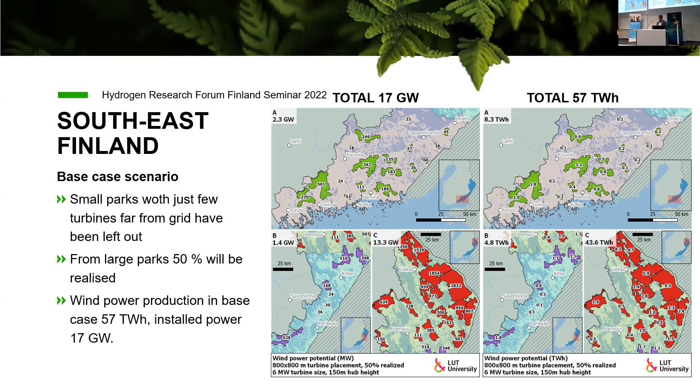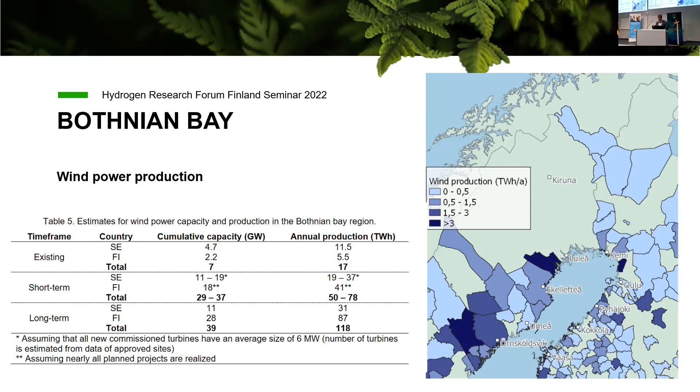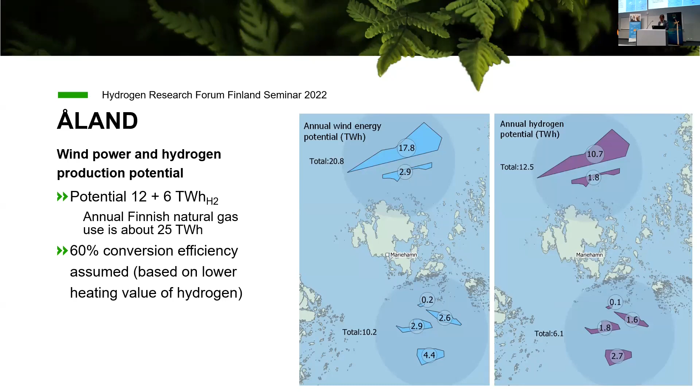A similar study was done for offshore wind power potential in the Åland region, also thinking of converting it to hydrogen, either offshore or by transmitting electricity to the mainland and then converting that electricity to hydrogen in a later phase. So these are just a few examples - of course there are many other places in Finland, and the actual potential is much more.

We've also been looking at solar power potential, especially in southeast Finland, looking at this kind of large-scale potential, mainly looking at peatlands and existing peat production areas, mainly for the reason that they are easily available from map solutions and are areas that already have some kind of road infrastructure. But there are also other areas beyond peat production, like wastelands, that could be utilized. We looked at the peat production areas and also some rooftop areas in this southeast and east Finland region.

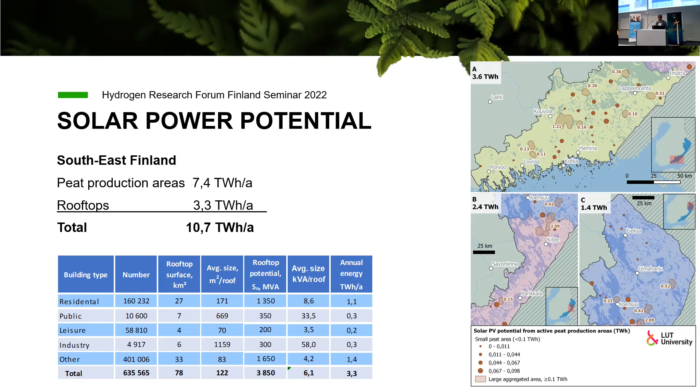With a 50% utilization rate - so 50% of peat production areas covered with solar panels - would lead to some 7 terawatt-hours, and rooftops, with let's say only half the roof and half of that covered with panels, would give some additional 3 terawatt-hours per annum. So solar power potential in terms of energy is also significant - about 10% of wind power potential, or even a little more in this area. They complement quite nicely with wind power, so often when it's not so windy, there's solar, and vice versa. Of course, the problem of seasonal storage still exists.

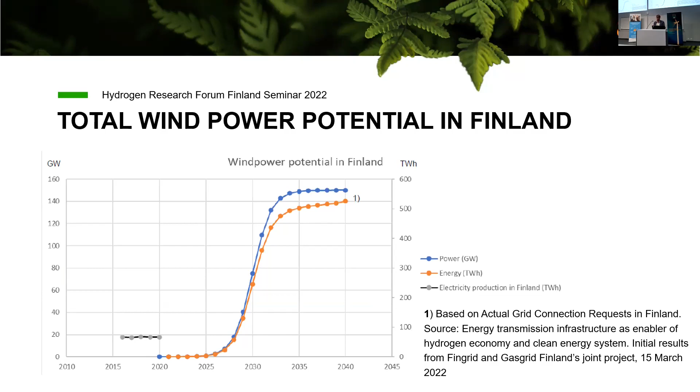This is roughly the same figure Simo was already showing earlier today, about the total wind power potential in Finland based on grid connection requests, showing huge increase potential, but of course also challenges in permitting, actual manufacturing, and other things. So maybe not to take this as a real development pathway, but to show that the potential is huge.

So from renewable energy production potential, we have up to several hundred terawatt-hours of wind and some 10% of that solar.

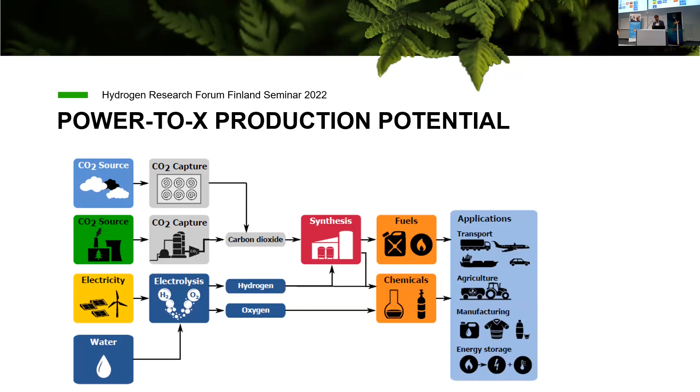Going to power-to-X production, we have been talking a lot about hydrogen, but hydrogen is often not the main product used. We need other kinds of chemicals, hydrocarbons, or fuels, chemicals, materials, plastics, and there we come to this power-to-X production. And there we need carbon dioxide if we produce hydrocarbons.

Of course, ammonia is one route for utilizing nitrogen and hydrogen, but looking at hydrocarbon production, we have good opportunities from our industrial plants, and we can expect even biomass burning for energy is probably reduced, but still we have chemical pulp industry and other forestry industries remaining, which produces high amounts of biological CO2.

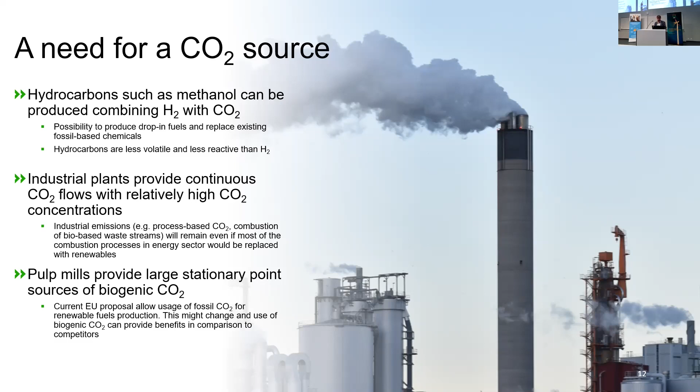Here is an example looking at Finnish pulp mills only. We have currently some 13 chemical pulp mills existing, and they produce more than 19 megatons of biogenic CO2 each year. Converting that to, for example, methane would produce more than 100 terawatt-hours of methane, which is 4 times the current natural gas consumption of Finland. It would require, of course, a significant amount of energy to produce the hydrogen, mainly for this power-to-X production.

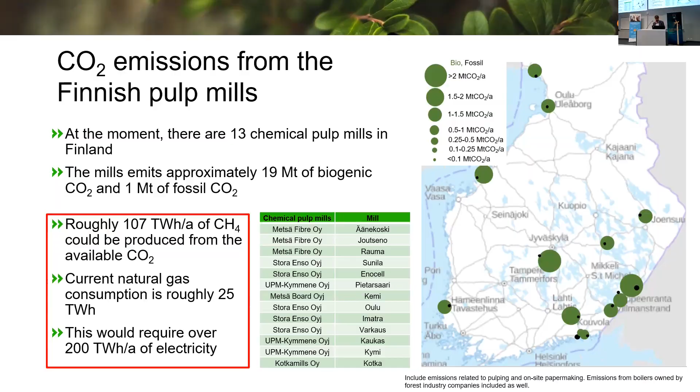A similar exercise for the Bothnian Bay region, only looking at the pulp mills there, and we have some methanol production potential. So in the Bothnian Bay region alone we could produce some 8 megatons of methanol from those biological CO2 emissions.

It is very difficult to currently say an actual price for, example, green methanol. Estimations vary very highly, and anyways, we are talking about a huge market and maybe in the future even more.

As an energy content, 8 megatons of methanol would be roughly the current energy use of road traffic today. Of course, it doesn't mean that methanol should be used only for road traffic, but just to have a figure in mind of what is the value, and it would require some 80 terawatt-hours of electricity to produce this hydrogen.

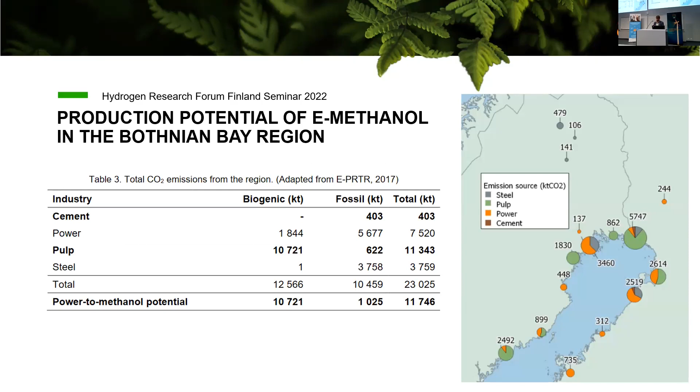Infrastructure has been discussed today a lot. There is a question we don't know the correct answers to: what will be transported, where the hydrogen will be produced. Shall we transport electricity, hydrogen, carbon dioxide, or perhaps chemicals, liquid or gaseous fuels, and so on.

Different storages, as Sami described earlier, in each part we can have storages for the different commodities, and those technologies are under development, and we should also know what are the performance and cost data, to have a rigid and resilient system.

We have been studying, for example, this North Karelia case. We don't have existing 400 kilovolt lines, so how much it would cost to build new lines, or how many parallel lines would be needed to utilize this wind power from North Karelia, where it would be utilized, or is it better to use it there.

And then also for this Åland area, some hydrogen transport scenarios for different areas have been done.

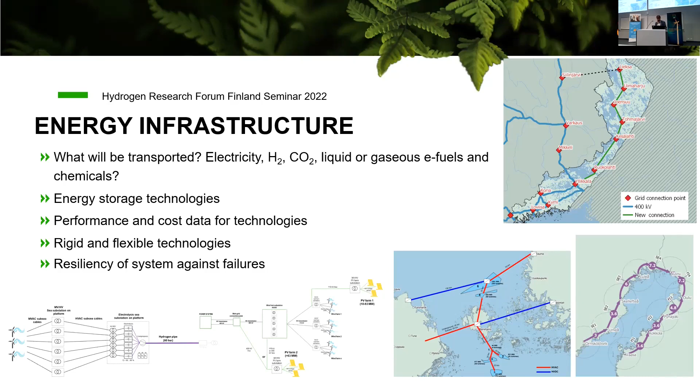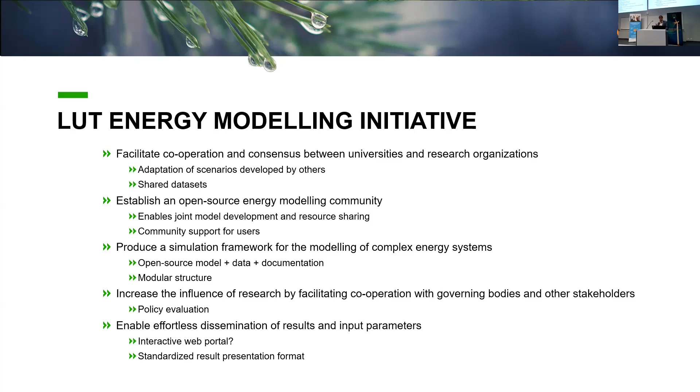Finally, I would like to advertise: we have been starting at LUT to do this kind of energy modeling initiative to answer some of these questions, so we should have cooperation with different organizations to share data and share this understanding of this energy system change and transition, and this kind of initiative has been started.

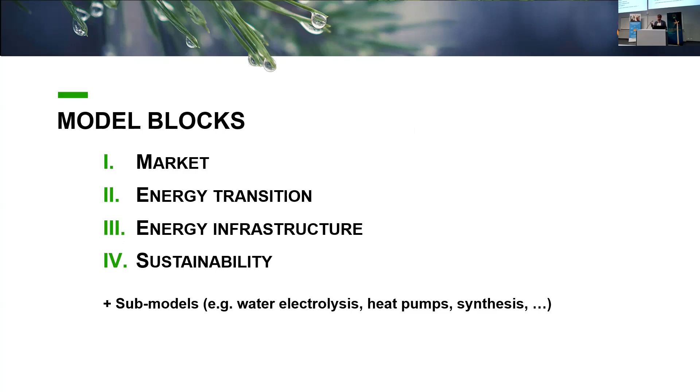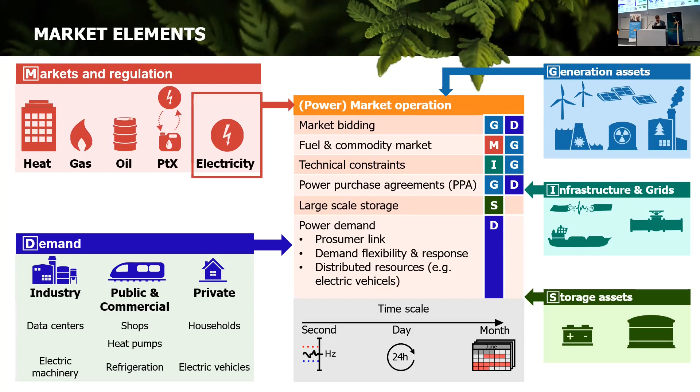We have been starting to think what kind of modeling blocks are needed for the energy market transition to the future, and so on, and I think we will tell you more about this later, but we wish to have all research organizations in this same task to get more understanding of how we should make Finnish society as efficient as possible, so we can use our great energy resources and material resources in the future.